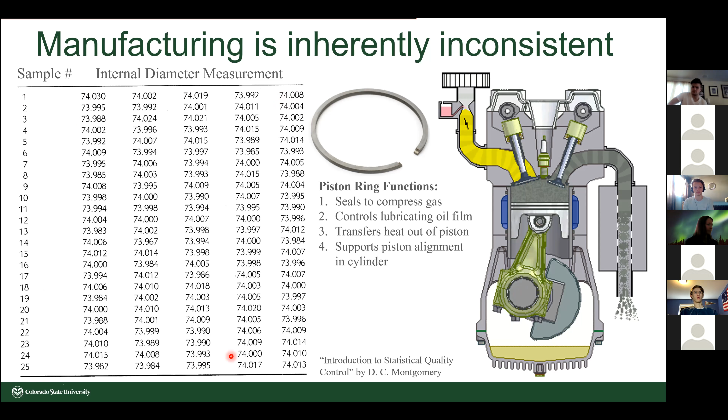The problem is not that these piston rings are imperfect — they're not perfect circles, but that's not really the issue. The question is, will they still fit and will they still function as they should? As long as the range of values we see is within the tolerance limits set by the engineer, there should be no issues with the fit or function of these rings.

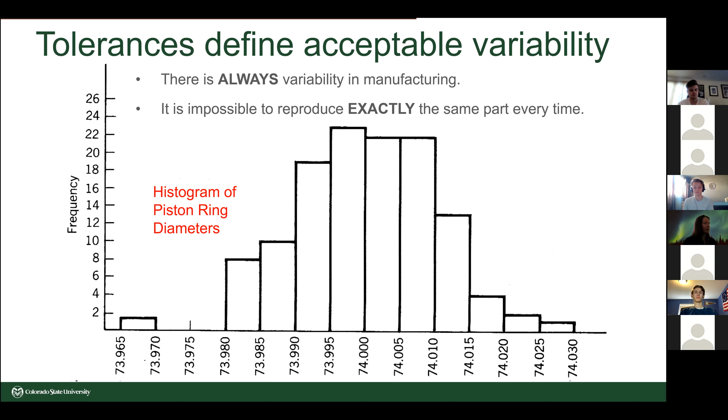So this variability when we're manufacturing stuff is just a fact of life — there's no way to get around it. In fact, it's impossible to produce anything exactly the same way every time. So, any ideas where this kind of variability in manufacturing comes from?

Can you think of reasons why we just can't control the manufacturing so precisely to be perfectly manufacturing every part the same way every time? Just natural vibration, wear and tear of machines, stuff like that. Yeah, those are great answers.

There's a whole list of things that can go wrong while you're manufacturing, and these are called manufacturing errors. There are two main categories. The first is systematic or bias errors, which have to do with the manufacturing system itself being faulty. For example, that includes instrumental errors, the wear of tools, friction, aging of the machine, and consistent misuse of the machine if it's not operated properly.

These systematic errors also include environmental conditions, such as where you're operating a machine, the pressure, the temperature, the humidity, which can affect the precision of the machine.

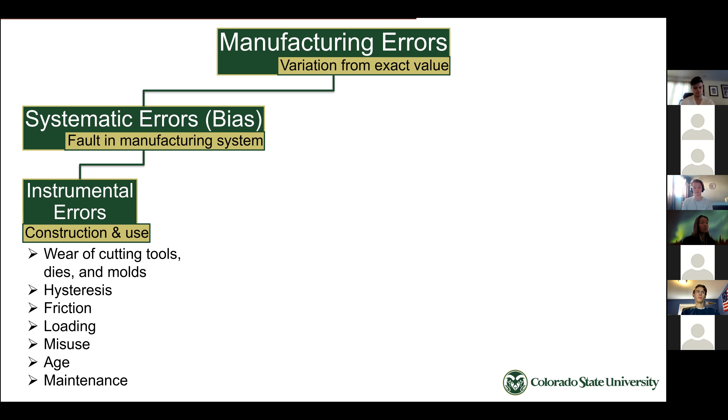The second group of manufacturing errors are called random or precision errors. Precision errors are the noise in the system, like vibrations, which can certainly be a fluctuation in the system. It could also depend on who the operator is and their skill level, which can change from manufacturing one piece to the next. There are also environmental fluctuations, meaning as you're going through the process of manufacturing one part, the local environment—temperature and things like that—might be changing quite rapidly.

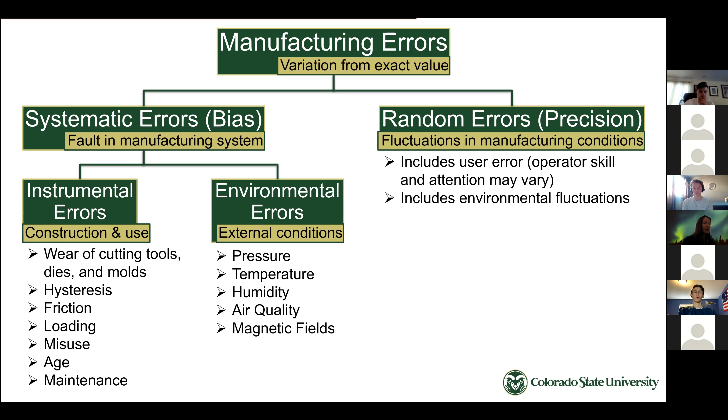The main takeaway is there's just no way to perfectly produce anything ever. Instead, we have to rely on proper tolerancing to guarantee the fit and function of our designs. Tolerancing a dimension specifies the amount of acceptable variation in that dimension. The amount each dimension is allowed to vary depends on the part function—what that dimension is supposed to achieve—the assembly of the piece parts, and the manufacturing process used to make that part.

For example, if you're designing a jet engine part, you're going to want tighter, smaller tolerances, or acceptable ranges, than if you were designing a bookshelf. Tighter tolerances automatically equate to more costly manufacturing, so there's a relationship there. Tolerancing is a balancing act between keeping costs to a minimum while still ensuring that your product functions as it should—in other words, making a reliable product.

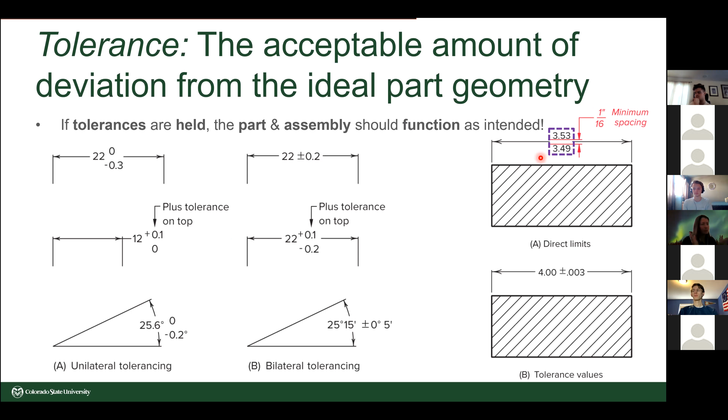Before the concept of tolerance was established, every part had to be custom made, custom fit to its mating part. If one part of an assembly failed, the best case scenario was that you'd have to make a custom fit replacement part—very costly and time consuming. The worst case scenario is you would have to scrap the whole assembly and buy a new one.

Imagine a world, because this used to exist, where something as simple as a threaded bolt you would have to purchase with its mating nut, and there were no other nuts guaranteed to fit that bolt. Early in the Industrial Revolution, all parts were handmade and assembled—every single part painstakingly adjusted to fit perfectly into its mating part. Typically, one business would be responsible for making every part in an assembly, because there was no standardization and everything had to be custom made. But in today's modern world, we're able to have different companies making different parts.

And then thanks to tolerancing, we can bring all of those parts together and make an assembly that doesn't need any adjustments at all. So the modern day concept of interchangeable parts started to take off around the beginning of the 19th century.

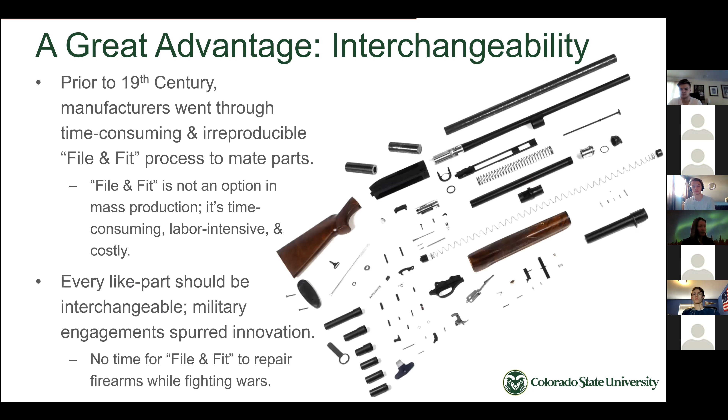I think it was the Civil War. One of the wars. Yep, it was war. Because, as you can imagine, weapons and particularly firearms were in need of having easily and fast to swap out parts. There's so many piece parts in a firearm, and every advantage counts in a war. So when something small gets damaged in your firearm, you can change it out quickly. That meant you had the advantage in the war. So that's really what spurred this innovation of tolerancing and part standardization.

So several factors go into tolerance selection, and the first we'll focus on is cost. When choosing the proper tolerances for your part, you must carefully consider every dimension of the part, keeping two main factors in mind: the design intent and the manufacturing cost. So we'll start with discussing what happens to the cost of a part when a certain tolerance is specified.

The cost of a part rapidly increases as tolerances are tightened. For example, decreasing a tolerance from plus or minus 0.010 to plus or minus 0.005 can more than double the cost to create that part feature, just that dimension alone. The increased cost stems from more time and different manufacturing operations needed to achieve that tighter tolerance. It's harder to achieve tighter tolerances. Plus, the reject rate for the part might increase quite a bit because meeting such a tight tolerance is less likely to occur.

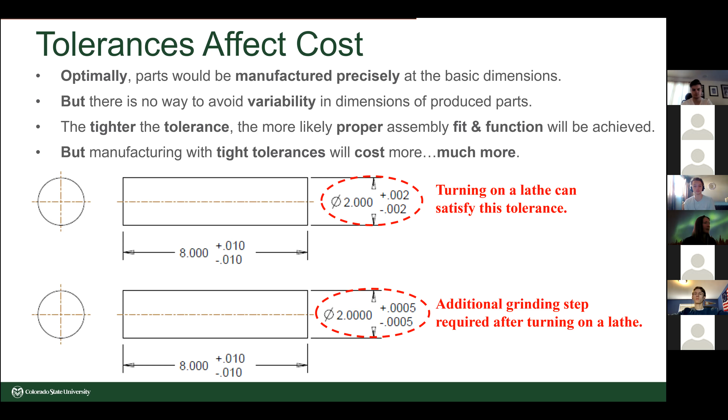The required tolerance for a manufacturing process must be carefully considered and matched to achieve the desired product quality at minimum cost. So it's always this balancing act. You can't simply demand a high machining precision, tight tolerance, for every feature of your part and say done for the day. Because when you do that, not only might it be difficult to actually achieve those tolerances through machining, but there could also be material limitations, and it's certainly not cost effective, or it's very time prohibitive to have to machine those tight tolerances.

So the question you need to ask yourself is, what is the loosest tolerance this shaft could have while still achieving the required functionality for the shaft, what that shaft is supposed to do in the product? There's a lot that goes into answering that question. It's not a simple question to answer, but we will touch on it briefly later in this lesson.

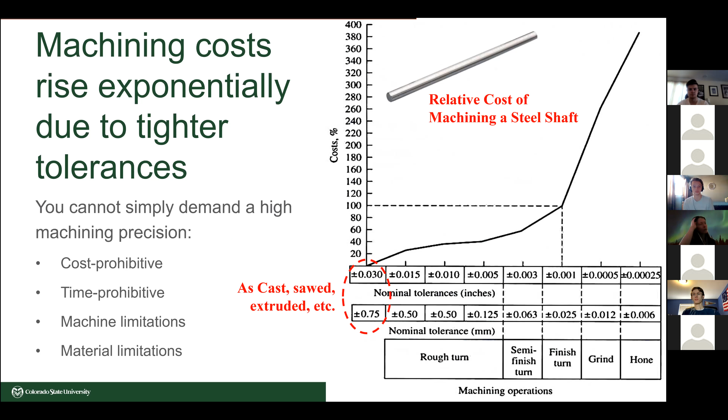It's important first to know that each type of machining process can achieve a specific and limited range of tolerances, and that's what this chart is showing. It's listing the different machining processes and their typical achievable range of tolerances you can hope to achieve by using that machine. Of course, these are just rough estimates, and the tolerance you can achieve on a particular machine is going to depend on what type of machine, the brand, the model, the maintenance, upkeep, the skill of the machinist, etc.

So you as the designer and engineer should always be aware of what machining process is being used to make your part feature. That's part of the design process, is knowing exactly how your parts are being made and being realistic about what can be achieved. So if a particular feature is not critical to the performance and functionality of the part, because not all features are going to be critical, then you should specify the tolerance for that feature at something easy to achieve by the machine being used, a nominal value, that expected tolerance for that machine.

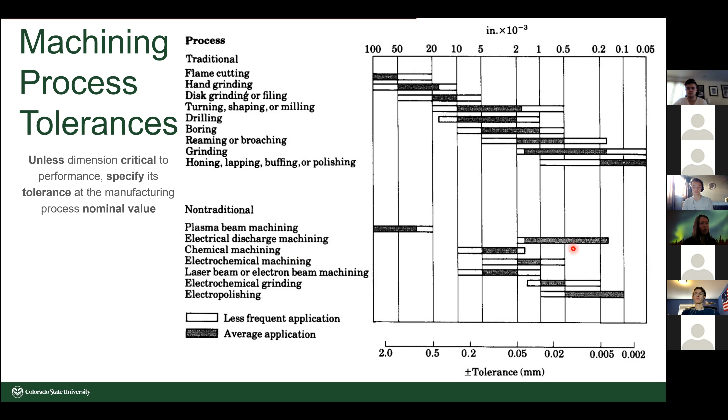Hopefully, if nothing else, this information has made you realize the importance of considering costs associated with your design specifications, those tolerances, and never arbitrarily assign tolerances, because these specifications must be carefully considered and, whenever possible, reduced to the most easily achievable values.

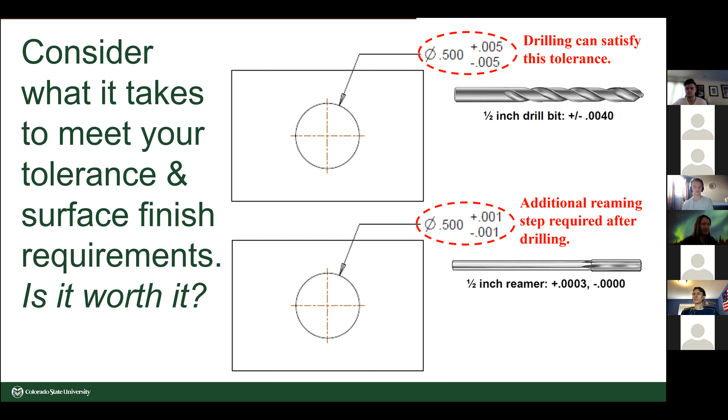And you're probably going, okay, so how do I know what specifications are appropriate for a particular application? Because at the end of the day, we need our products to function, right? I think we have a little time left, and I'll talk about that briefly with design intent and how your design intent leads to proper tolerancing.

Now that we know how much tolerances affects cost, we must be deliberate in specifying our tolerances. Of course, the number one priority of tolerancing is to guarantee our assemblies fit and function as needed. With any design, we must first identify the functional features of each part. The functional features are the ones that typically interact with other components, or they come into contact with other parts. You can consider those the functional features because they have to interact or do something. And often these contact points are going to be dynamic, or they're going to move during operation of the product.

So they're critical to the performance of the product. These functional features should always be dimensioned and toleranced first, and then you can finish dimensioning and tolerancing the remaining features of your part that are not directly related to the successful functioning of the assembly. So those non-critical features should receive tolerances that are easy to achieve by the manufacturing process used. For example, once you know the type of machine you're going to use, choose a nominal tolerance that machine can easily achieve for the non-critical features of your part.

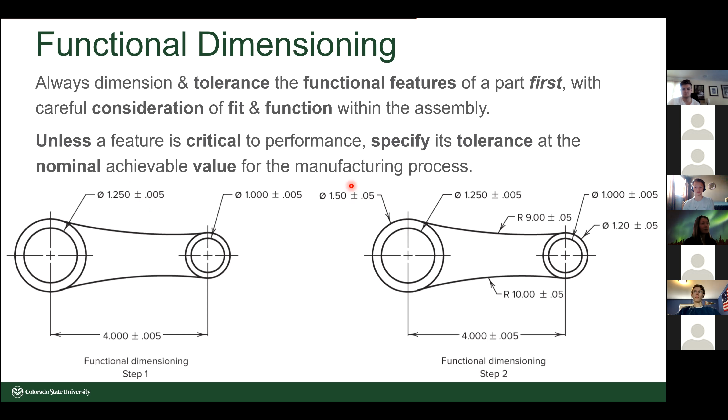But you might be asking yourself, how do you know what tolerances are appropriate for certain functions that you want to get out of your assembly? Let's look at an example of why it's important to know what functionality you're trying to get out of your part. So currently we have a hole and a shaft that mate. Right now, they're just both dimensioned with their basic diameter, there's no tolerances given. So can you imagine if a machinist received this information and they only had the basic diameter, what potentially negative outcomes could you imagine when you receive these parts back and you try to assemble them?

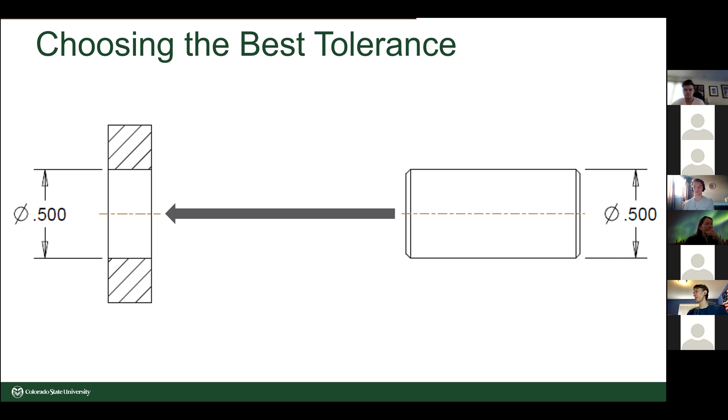The shaft is too big or the hole is too small. Exactly. It could be, let's start with the shaft being much smaller than the hole. And you go to assemble this and there's just a lot of play between the shaft. You can move the shaft all around in the hole. And this might be a problem if the point of that shaft is for some alignment purpose. You need that shaft to fit quite snugly into the hole to make sure that whatever you're trying to align, aligns properly.

Another issue, you could get it back and the shaft's much bigger than the hole. Now you're going to have to forcefully mate these two pieces together. And there's no possibility that shaft could rotate in the hole after it's installed, which would be very bad if the point of the shaft is to be able to rotate. We have a lot of machinery that has rotating shafts, usually on bearings, but point being, you could easily have that functionality needed for the shaft. No way it's going to happen if you have to force fit them together.

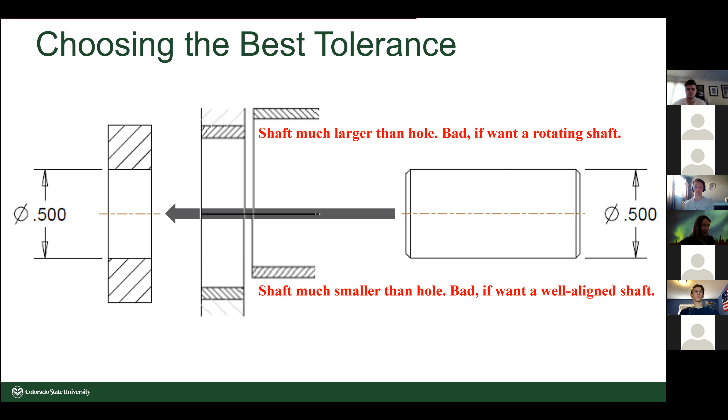So that's where the tolerance comes in. But of course, you need to know the purpose of this shaft. Let's say the purpose is that first purpose, which is to precisely locate a third mating part that would be slid on the opposite end of the shaft. It's not shown here, but let's say there's another part. So the shaft goes into this hole, and then a third part is on the opposite side. That third part needs to be properly aligned with some other feature on this part with the hole. So the shaft just serves as an alignment tool between the part with the hole and a third part not shown.

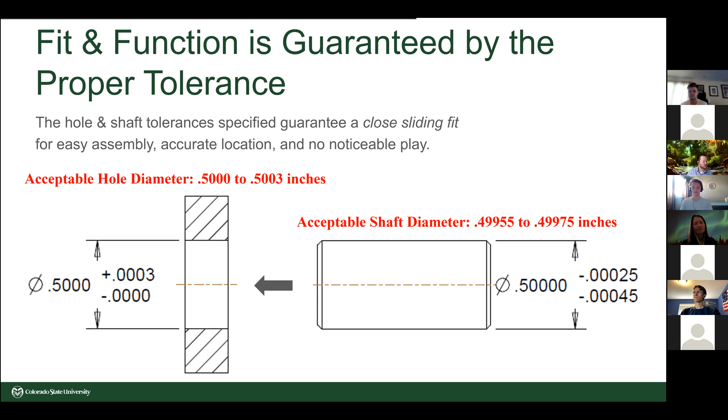Thanks, Dr. Roberts, that's great. And yeah, this kind of ties into what I teach, which I'll go into here in a minute once the screen— if you could stop sharing your screen, yes Bonnie, that'd be awesome. Thank you. All right, so hi everyone.

My name is Dr. McGilvray. I am faculty here in mechanical engineering. I used to say I was inbred to CSU, meaning I got my undergraduate, my master's, and my PhD here, but that's not very PC anymore, so I say I'm homegrown, as it were. I love the mechanical engineering department here at CSU. The stuff we do, the educational quality we give, I think is top notch. It allowed me to stay here. So if that speaks for anything, there's my general feel about it.

So I teach three classes inside the mechanical engineering curriculum. The first being structural finite elements, a 300 level core class you would have to take. In that class, you learn how to use programs to run finite element analysis. We've all seen finite element analysis before—it's a computer model that represents 3D structures and applies loads, boundary conditions, material properties, and those types of things, so we can determine if they're going to fail or not. For example, what Dr. Roberts was just talking about—a lot of times we would check fit, mechanical strength, assemblies, that kind of stuff.

I teach another class, machine design, Mech 325, again a core class you would have to take. In there, we look at components of machines—how do we develop bolts, how do we develop things that are going to be in contact, whether that's sphere on sphere such as in a bearing, or sphere on flat surfaces. We talk about impact loading, failure analysis, all those types of things. And then finally, I teach a class called Mech/Biome, meaning it's in the Department of Mechanical Engineering as well as in the School of Biomedical Engineering. That's a 500 level class, 573, structure and function of biomaterials.

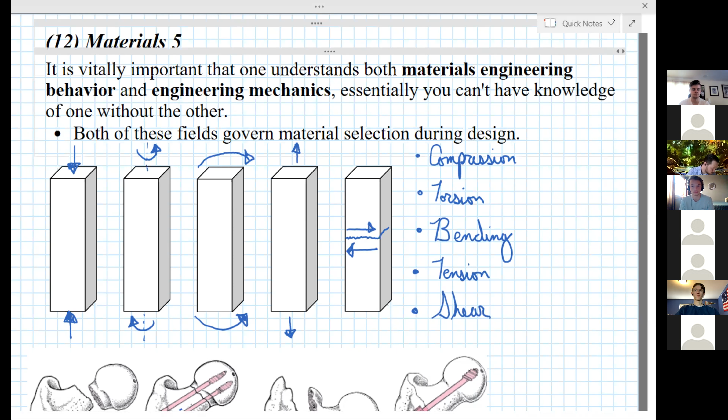If we look at these components real quick, an interesting thing you may not realize is that if I have a component and I'm loading it in tension, I'm going to draw it this way. I'm going to take my generic piece - this can be anything you can imagine - and load it like this. Well, what is the stress? Stress, sigma, is this force, F, divided by this area.

Area A. This is some force. Stress in the system is just our force over area, okay? So I look at stress as one of our critical components, because we can compare that to the ultimate tensile strength of this material, whether it's steel, aluminum, wood, composite, biologic, whatever have you.

Well, if I look at the stress distribution, what does it look like? It is uniform, meaning no matter where I probe through the thickness of this part, you can see that it's uniform, okay? So this is axial stress. I'm going to just say sigma axial.

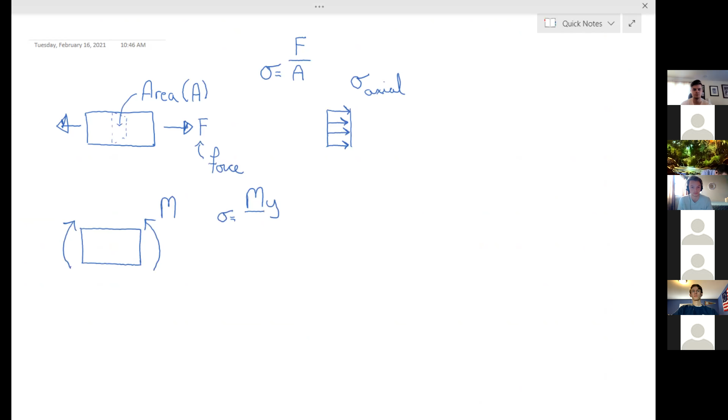Well, what's interesting now, let's just look at another one of our flavors of loading. Let's say bending. This bending, I'm going to say M. Bending is caused by a moment, a bending moment, hopefully you've heard that. So what does its stress look like? Its stress has the formulation of M Y over I, where Y is a distance inside my component, and I has to do with geometry. I equals a function of shape. All that's to say is that my I would change if I had a circle, a triangle, shape of a bone, moment of inertia, that's what it's called.

So what's interesting about this: if I'm bending this, and here is my neutral axis, meaning the middle of the bar in this case, what would we expect to be happening at the top of this component? Does anyone want to guess? We're bending it up, creating a smiley face. Imagine this beam is made out of a bunch of fibers or noodles. What would the fibers at the top be doing? What kind of load would they be under now? Think about the fibers, you're bending something up. What's happening to those fibers? Are they elongating, stretching, or compressing? They're compressing, right? So at the top of this beam, what we actually get is compression.

And it's a linear compression that goes down to zero at the neutral axis. So that means at the neutral axis, there is no stress in bending, okay? That's an interesting finding, meaning if I know that and I want to drill a hole in this part under bending, where would I drill that hole? Well, I'd probably drill it in the middle of the beam because there's no stress there. No stress, no failure, right? So then what's happening at the bottom of the beam? If the top fibers are being compressed, what are the bottom fibers doing? Stretching. Yeah, stretching, right? So now I have the opposite on the bottom here.

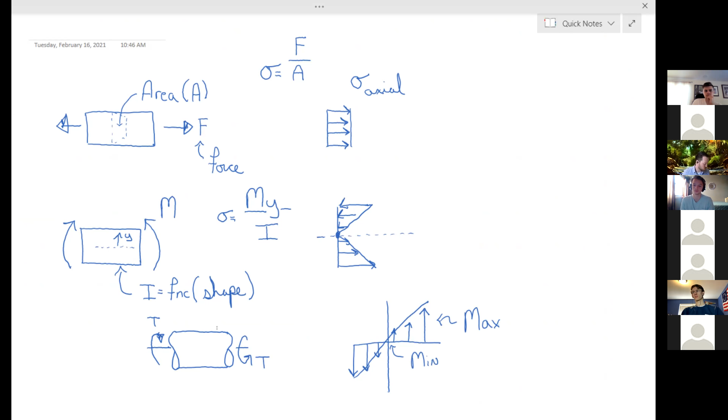Okay, so great. What does that do for us? Why do we even care? Well, now let's go back to a real world scenario and talk about that.

Okay, so this is something I talk about in my advanced biomaterials class, right? We would talk about machine design. A bolt is a machine in our component. So say I want to design a bolt to replace a fractured femoral head. These are stainless steel bolts, sometimes chromium, sometimes titanium, but mechanical engineering at heart. This is a lag screw. Basically, we can think about that—it just happens to be going in the body. Same technology you'd use to put a 2x4 in your basement against your concrete substrate, okay? So we have our fracture. We can obviously see this here.

Well, as a mechanical engineer, what is my solution to most things? Step one, hit it with a bigger hammer. If that doesn't work, try to find an even bigger hammer and hit it again.

So in this case, what do we do? Well, we hit it with two big lag screws and bolt those together. And that's what these are, these lag screws going across our fracture site.

And what happens in the hip, we have some kind of oblique load like this, right? This goes into your pelvis, this is the head of your femur. So let's just say you're standing on one leg, this is going to be body weight.

Now from what we were just talking about, realizing that there's stress distributions inside a component due to loading, this is a loaded component, it's a bone. Let's see what happens. So now if I'm going to look here versus here where my screw is, versus here, maybe below my screw, well, hopefully we can appreciate.

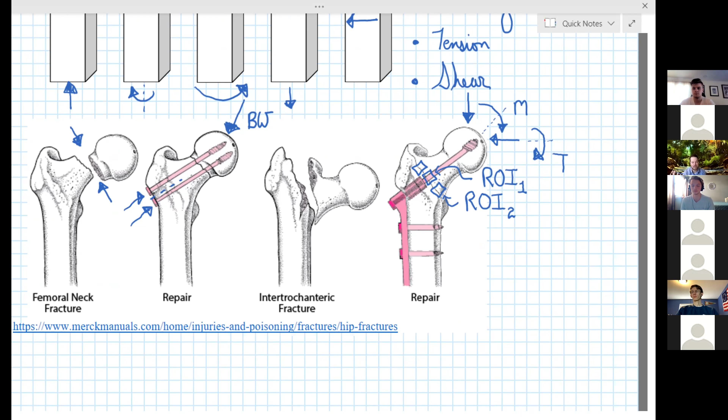If you got in an elevator, for example, and you couldn't trust the mechanical engineer who designed it, think about how the world would fall apart, right? The public trusts us as mechanical engineers to know what we're doing. And that's what machine design is about, looking at how we can design these components such that they don't fail. That's critically important.

So just going to use one minute. Let's just look at, say, ROI 2. I'm just going to draw a very generic shape here, see if I can get both on the page so we know what I'm talking about. Now I'm going to look at ROI 1, that's the interesting one where my screw is. So if I just take that, obviously this is a 2D representation, but what do I have?

These are equal and opposite, so I'm just going to draw these here for completeness. And I may have some torsion on this component here. So this could be shear stress due to torsion, maybe plus shear stress due to transverse loading.

So all of a sudden I have all these stresses on my component, and now I can compare those stresses. I can calculate those after you take machine design. I can compare those to my limit.

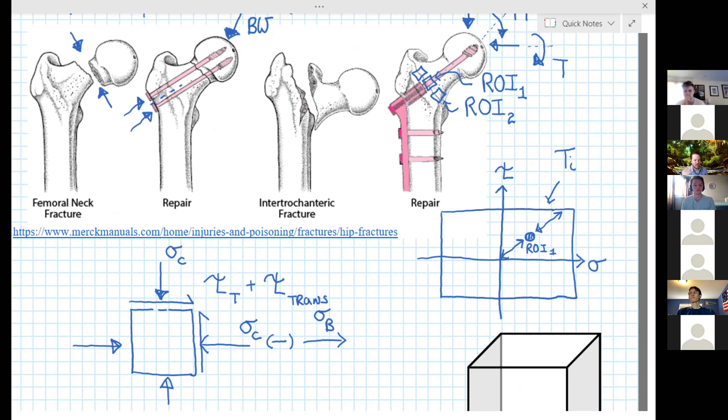So now you've taken all these mechanical principles of understanding stress and been able to design a component. And this component can basically be used for a variety of things—anything in the world that you can think of.

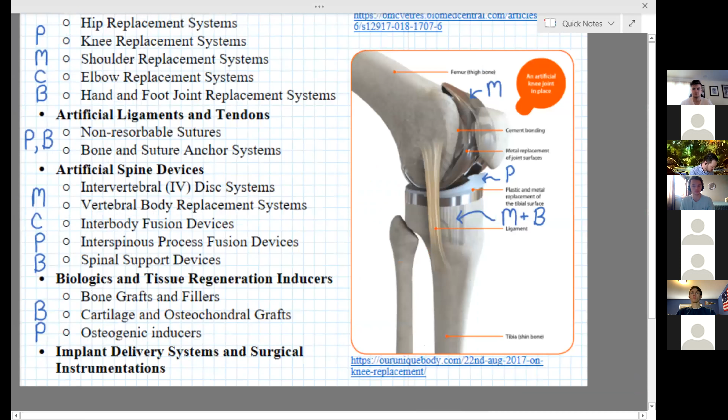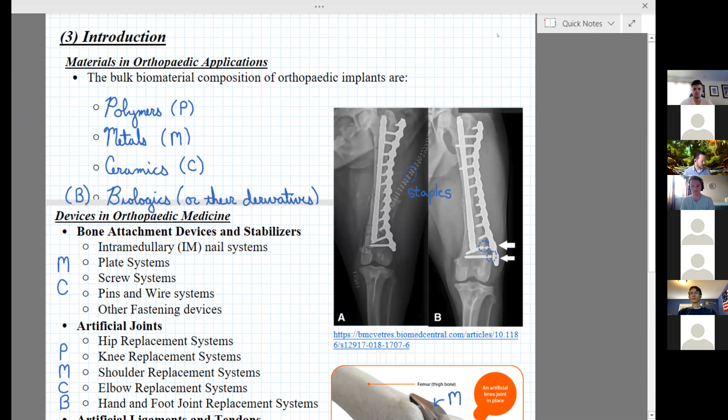For me, the reason I show this—again, this is for my advanced biomaterials class—but it goes back to all the classes I teach, whether structural or not. I can look at this and use this analysis on polymers, on metals, on ceramics, on biological tissues. And why would I want to do that?

Well, this is a picture here on the right. This is another orthopedic implant, a plate. Obviously this one was not designed great. If you can see down on the left, let me just circle it in red down here.

Somebody messed up, those screws broke. That's a big problem, right? If screws break in the body, the plate's not working, thus we have issues. As a mechanical engineer, I see this and it gives me heartburn. This was not designed correctly.

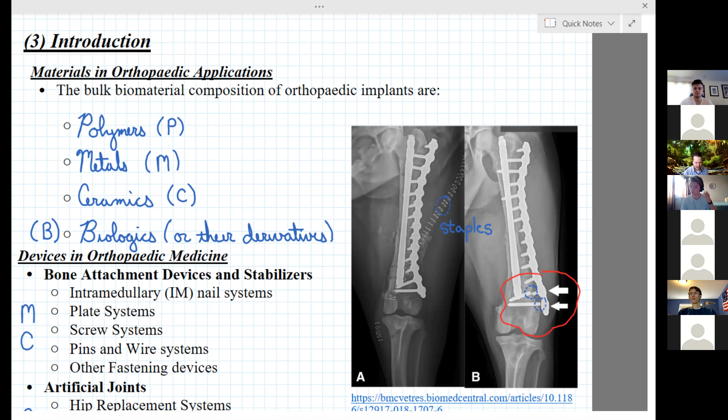So how do I go back? I redesign those—look at the stresses in the computer space, look at that on the analytics space, and all those things.

And then lastly, these are not simple analyses. We may be talking fundamentals here, but they actually build and build and build until you can look at very complex things. For example, here I'm showing a schematic of an artificial knee.

We have a metal component, a polymer component, a biologic and metal component, soft tissue components. We need to know how to look at all of those under the boundary conditions and the loads we expect in the body.

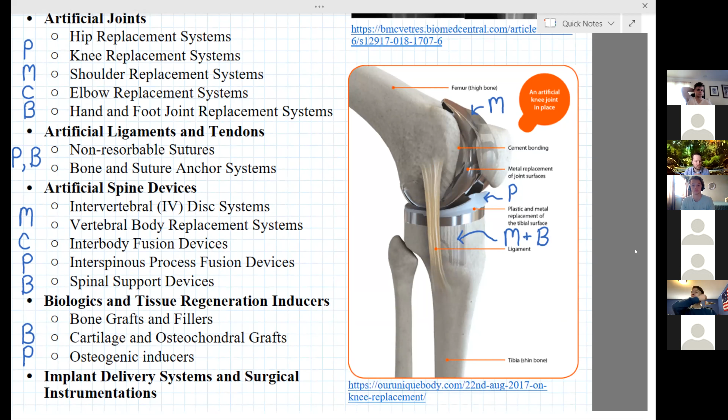So that's, for me, what mechanical engineering is here at CSU—combining all of that stuff and bringing in what Dr. Roberts was talking about, tolerancing. That's a huge part of everything I just mentioned. If the tolerances change, these things don't fit in the body, the screws don't fit, they're not reliable—big issues.

This comes back to what Dr. Bashara was talking about—algorithms to actually solve for these stresses. By no means do you want to do this over and over again in your notebook. Can we develop algorithms that can look at these components, solve for these stresses, and actually determine what's going on?

So in my mind, that's the 30-minute view of mechanical engineering and how we apply it, from the fundamentals all the way up to advanced research here at CSU.